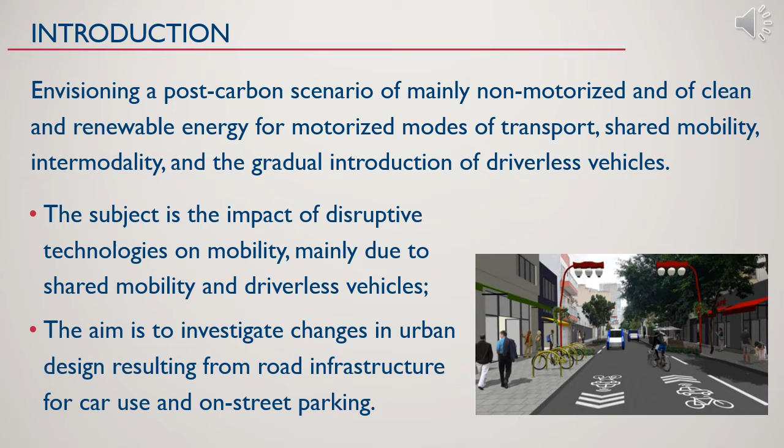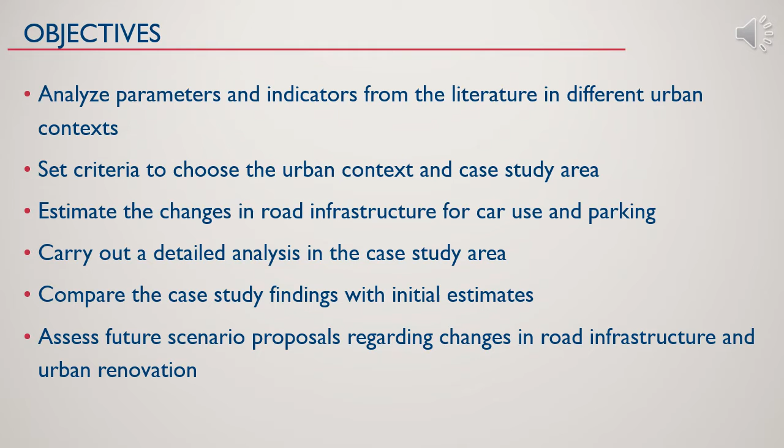The aim of this paper is to investigate changes in urban design resulting mainly from road infrastructure for car use and on-street parking. The main objectives include: analyze parameters and indicators from the literature in different urban contexts, set criteria to choose the urban context and case study area, estimate the changes in road infrastructure mainly for car use and parking, carry out a detailed analysis in the case study area, compare the case study findings with initial estimates, and finally assess future scenario proposals regarding change in road infrastructure and urban renovation.

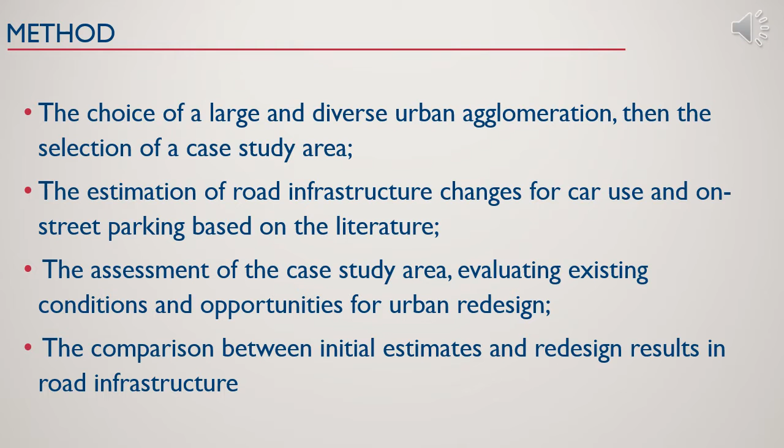The method has 4 steps: the choice of a large and diverse urban agglomeration, then the selection of a case study area, the estimation of road infrastructure changes for car use and on-street parking based on the literature, the assessment of the case study area, evaluating existing conditions and opportunities for urban redesign, and the comparison between initial estimates and redesigned results in road infrastructure.

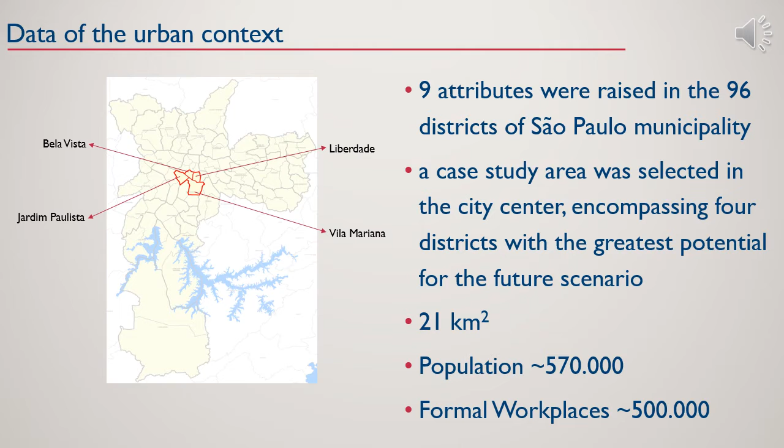The data raising of the urban context includes 9 attributes in the 96 districts of São Paulo municipality with 11 million inhabitants, a case study area selected in the city center encompassing 4 districts with the greatest potential for the future scenario, totaling 21 square kilometers, a population estimated in 570,000 people, and around 500,000 formal workplaces. Just to give an idea, here we can see the same area compared to A Coruña.

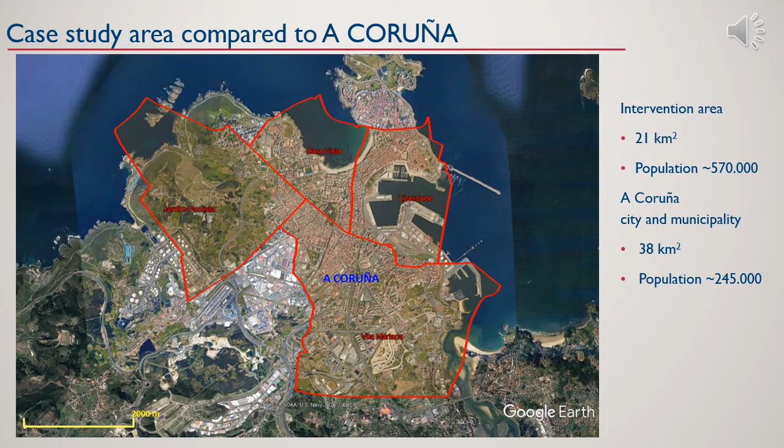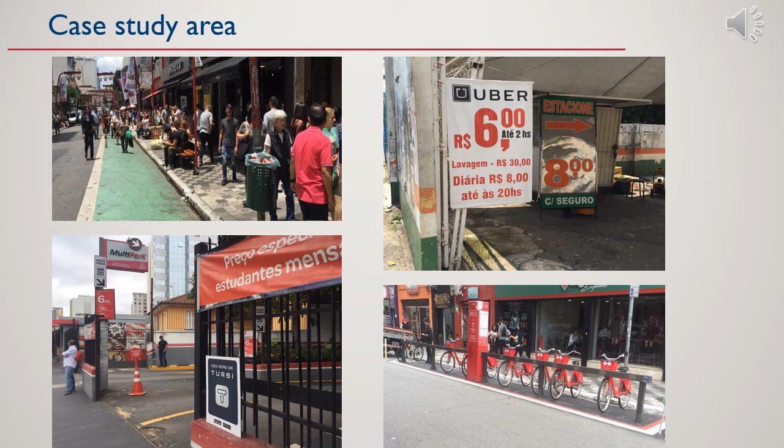Here you can see some of the streets in the case study area in São Paulo, showing the expansion of the sidewalks for pedestrians, the special conditions for parking of shared vehicles, and shared bicycles.

Data raising of the road infrastructure in the case study area includes listing, classification, and measurements on all 294 roads, including vehicle circulation area, on-street parking area, sidewalk area and width, bicycle lane extension. Then, a selection of 17 roads was carried out, chosen for detailed redesign and changes in road infrastructure.

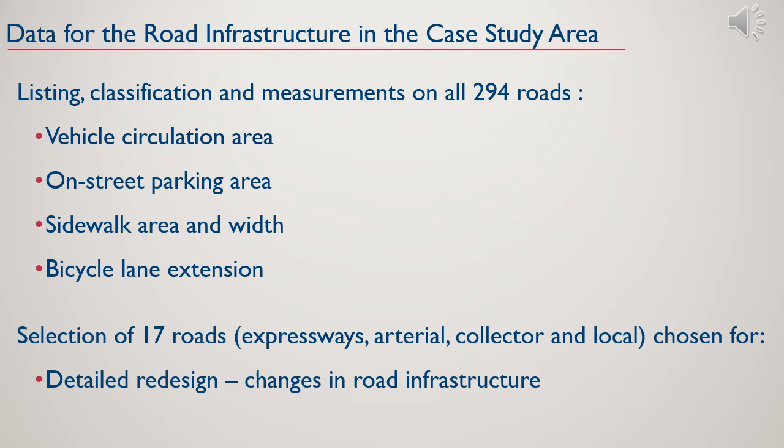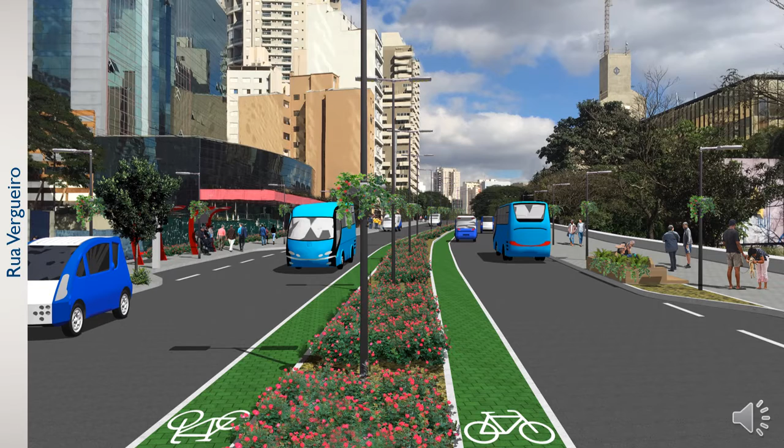This is Rua Vergueiro. As for the 17 roads selected for detailed redesign, this is an example of a collector road with the removal of on-street parking and widening of street islands, sidewalks, and bicycle lanes. Driverless vehicles replace the conventional ones, and buses have right-of-way over cars.

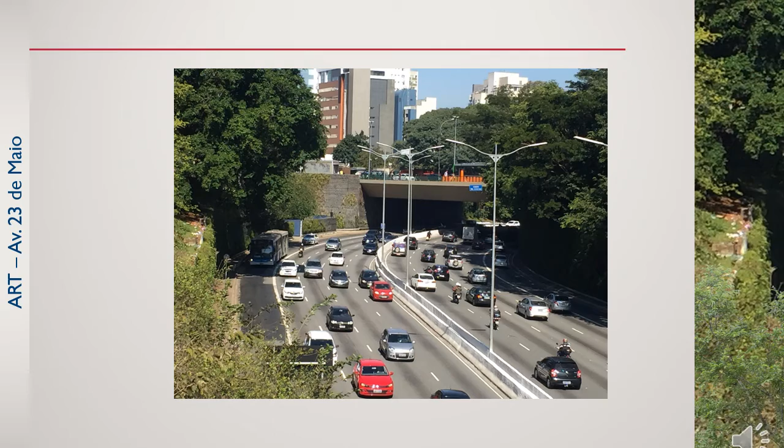This is Avenue 23 de Maio, an example for an expressway traversing the case study area. Conventional vehicles use this expressway to go through, but to access the case study area they must be parked at one of the hubs. Autonomous rail rapid transit uses segregated lanes alongside the central traffic island.

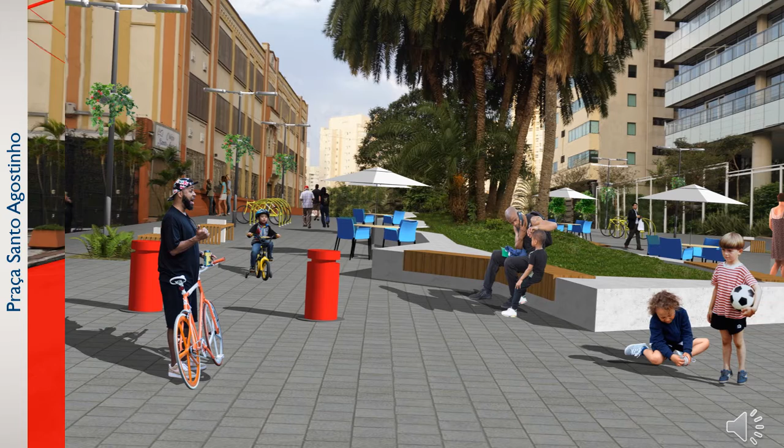This is Praça Santo Agostinho, an example for an area currently used for vehicle circulation and on-street parking that can be converted to pedestrian use, including social activities.

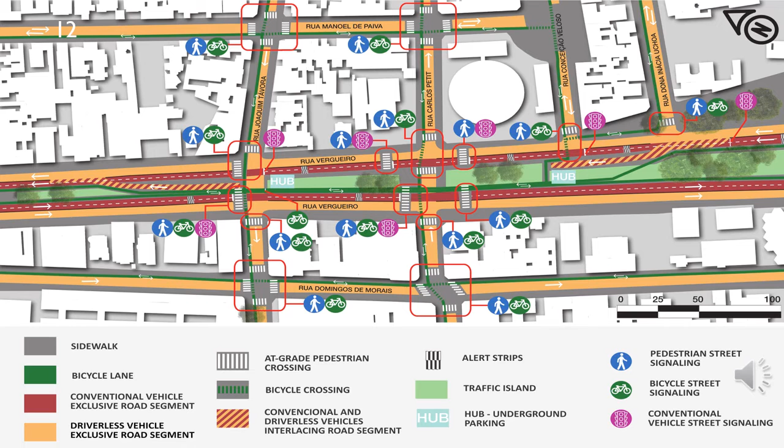Changes should occur from the central area outwards gradually, but since the city can't be disconnected, solutions for the interfaces were sought and also for the main roads connecting the city. This figure shows some of the intersections with conventional vehicles approaching the study area, coming from other places where they are able to park and to transfer to public transportation or to a driverless car.

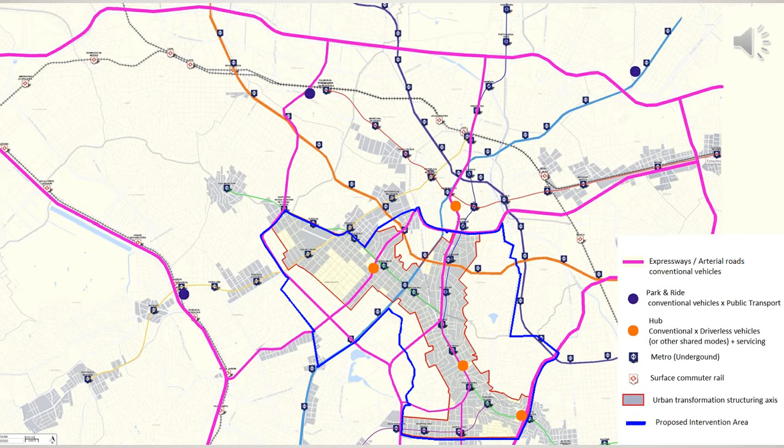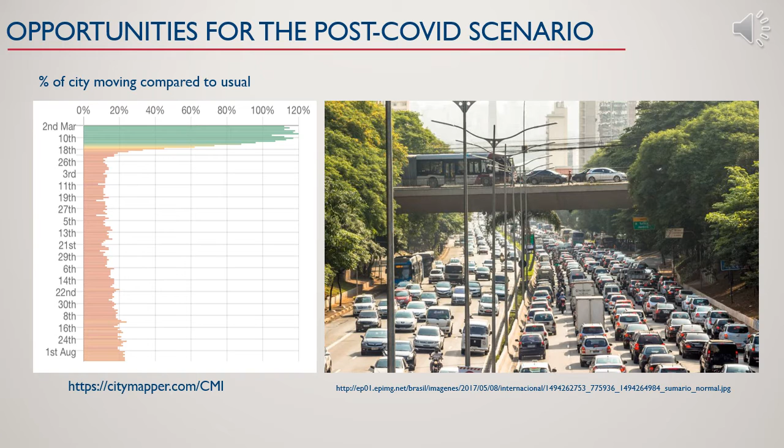The results add new findings to previous studies discussing disruptive technologies on mobility, their impact on the city, opportunities, and proposals for urban redesign. The proposal for the case study area includes vehicle circulation and on-street parking areas converted for better, sustainable uses, totaling 22.8% of the case study area, 45% average increase in sidewalks width, and 500% increase in bicycle lane extension.

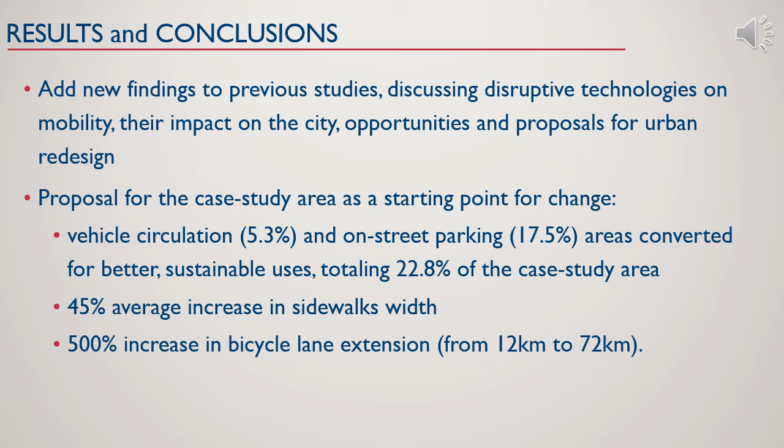The main contribution is the proposed method for the assessment of disruptive technologies on urban mobility, including road infrastructure dimensioning and urban redesign, applicable to other cities, incorporating the shift to driverless vehicles and the trend for shared mobility, following the priorities pedestrian, bicycle, mass transit, and driverless vehicles.